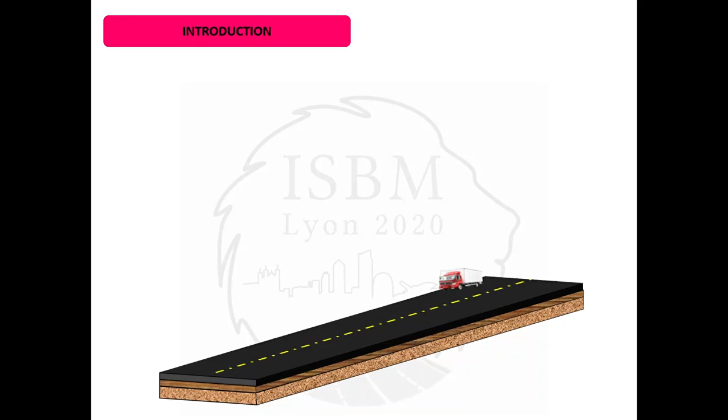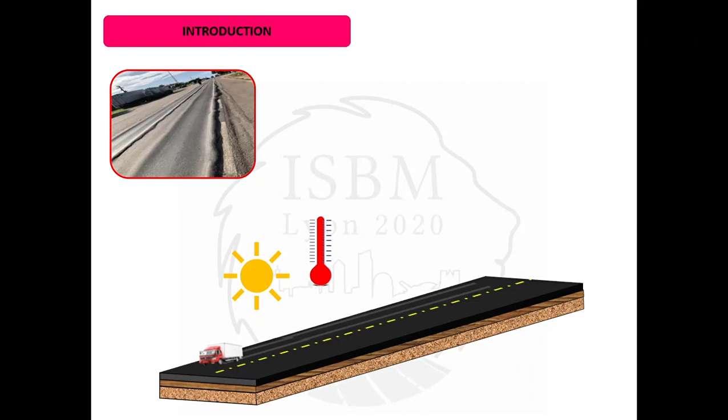It is important to point that one of the main distresses that occur on asphaltic surface layer is the permanent deformation, and it can be caused especially by the traffic load and the high temperatures. Here in the city of Fortaleza specifically, we have a tropical weather, which is favorable for the occurrence of permanent deformation on asphaltic pavements.

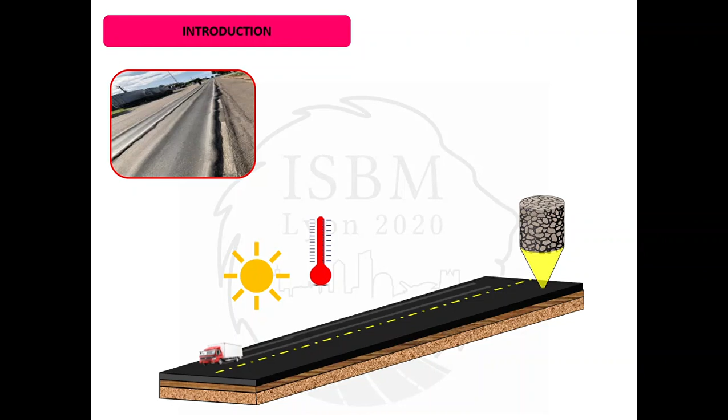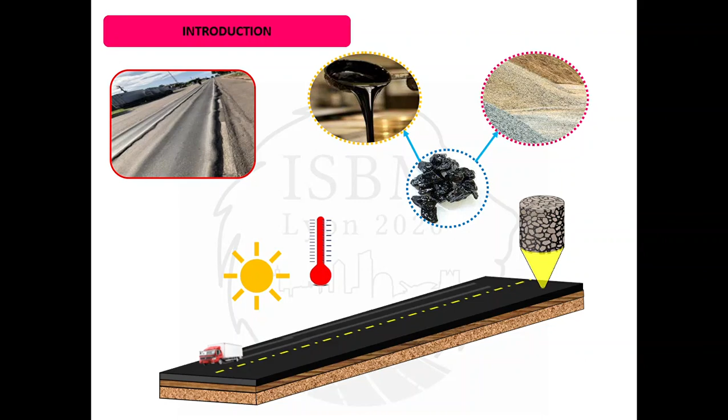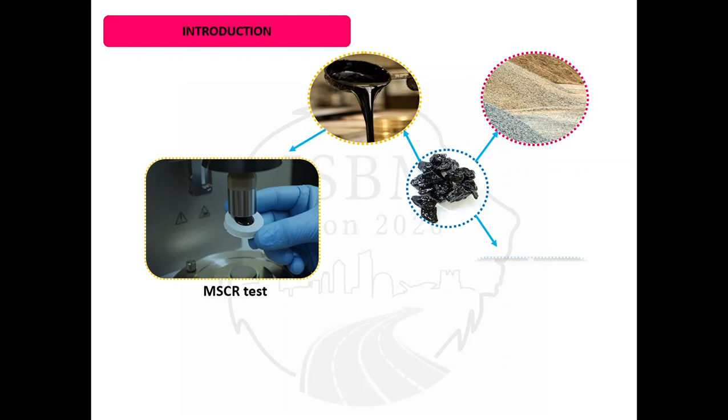To analyze the mechanical response of the materials towards this distress, we have to analyze not only the mixture, but also its contents, the binder and the aggregates. For this paper, we analyzed the binder's response with the MSCR test and the mixture's responses with the uniaxial repeated load test, which provides us the flow number value.

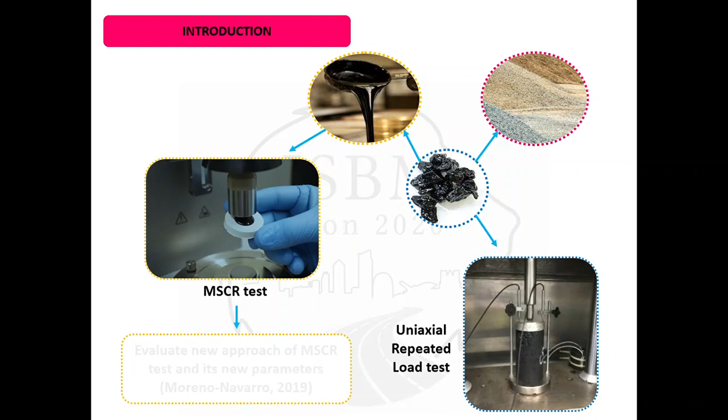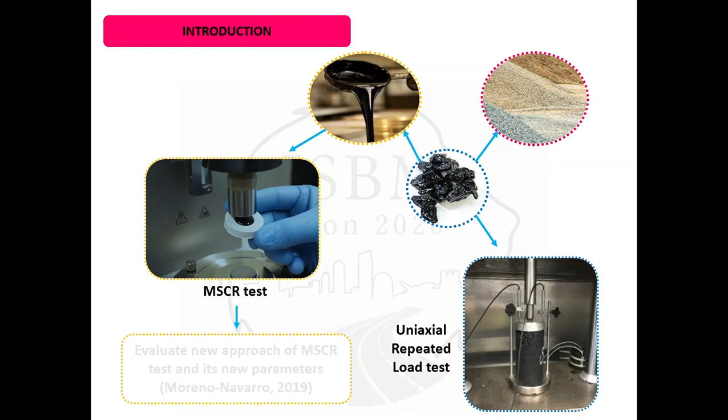But the main objective of this paper is to evaluate the new approach of MSCR test and its new parameters proposed by Moreno Navarro in 2019. And in Brazil, the national standard for this test protocol is still being implemented, so new inputs and reviews are welcomed at this stage.

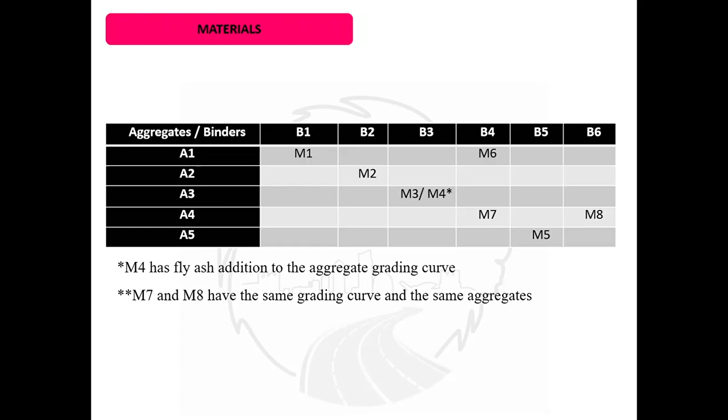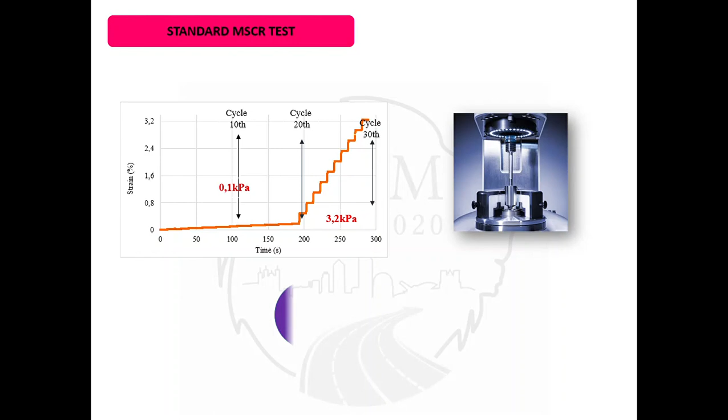The standard MSCR test was done following international standards, and we obtained with it the parameters of non-recoverable compliance and the percentage of recovery for each binder.

We have here binders analyzed on its performance grade temperatures, and according to those temperatures and the values of non-recoverable compliance, we only have indication to use binders B1 and B2 on a standard traffic load.

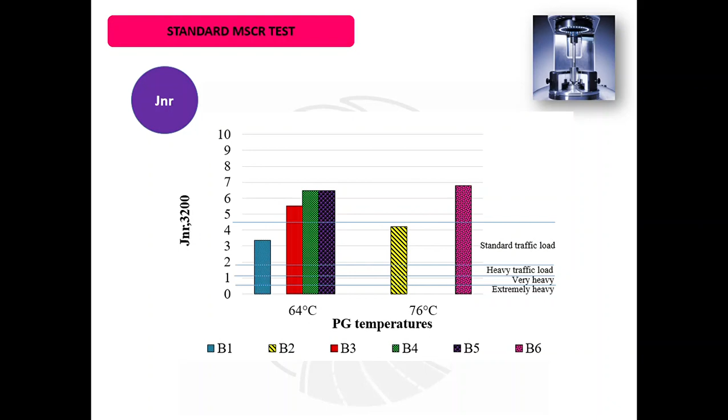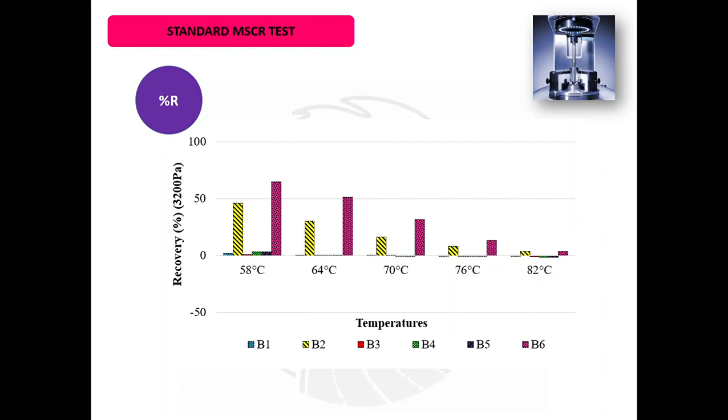With the percentage of recovery, we can identify that binders B2 and B6 have better response when it comes to permanent deformation on every tested temperature.

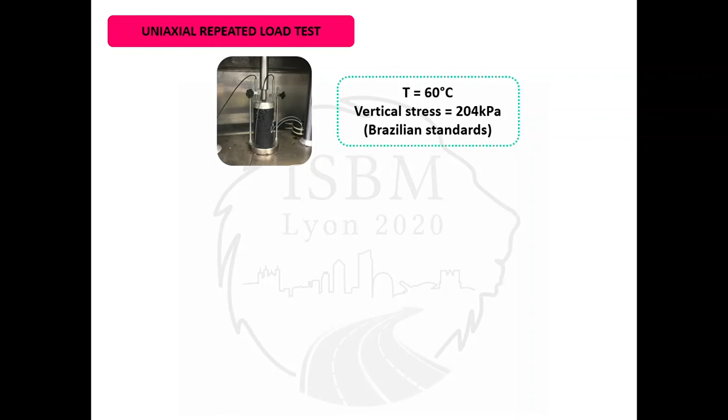The uniaxial repeated load test was performed according to Brazilian standards, using the temperature of 60 degrees Celsius and the vertical stress applied of 204 kPa. With that, we obtained the flow number values for all 8 mixtures.

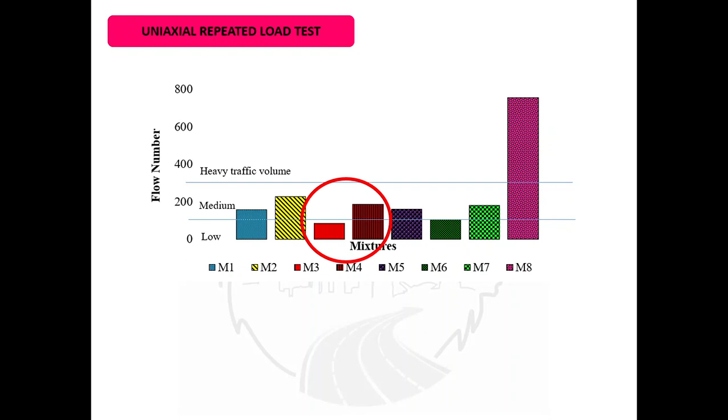We have here the classification according to the traffic volume for the 8 mixtures following Brazilian standards. If we analyze closely mixtures M3 and M4, we can observe that the addition of fly ash to mixture M4 resulted on a better mixture when it comes to distress of permanent deformation.

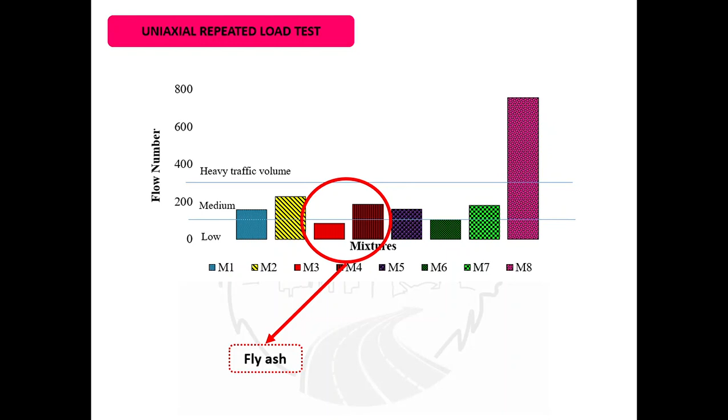If we analyze here mixtures M2 and M8, we can see that the lower non-recoverable compliance presented on binders was on the binder used on mixture M2, and the higher recovery percentage occurred on the binder used on mixture M8. So it is comparable to the binder results, the flow number results.

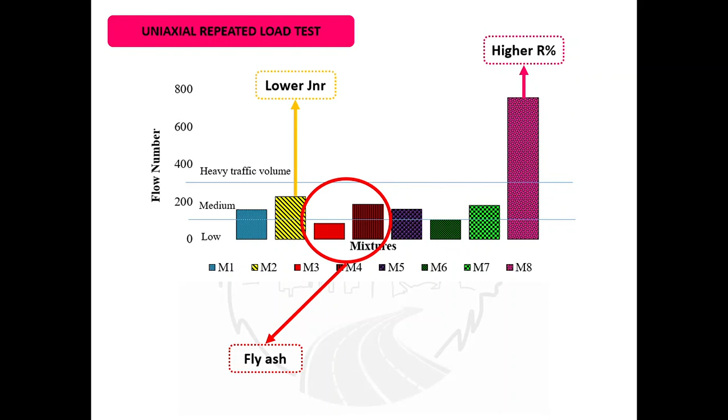If we analyze mixtures M1 and M6, we can observe that binder used on mixture M1 had lower non-recoverable compliance and higher recovery percentage, which is good for permanent deformation. And the result of flow number values also showed that tendency for the mixtures.

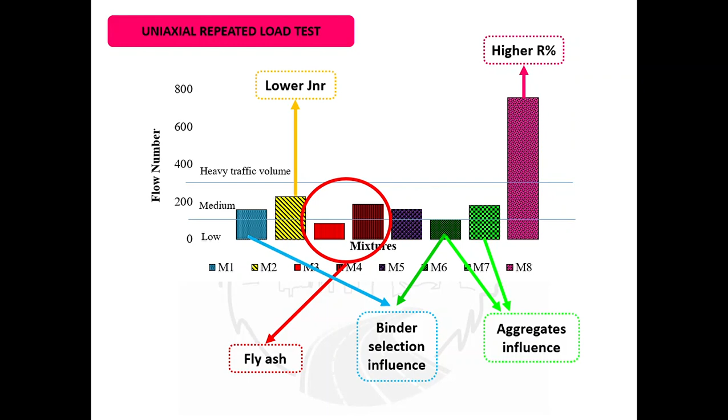On mixtures M6 and M7, different types of aggregates were used in the same binder. We can see that the aggregates also have influence on the final results of flow number values and on the response of the mixture for permanent deformation.

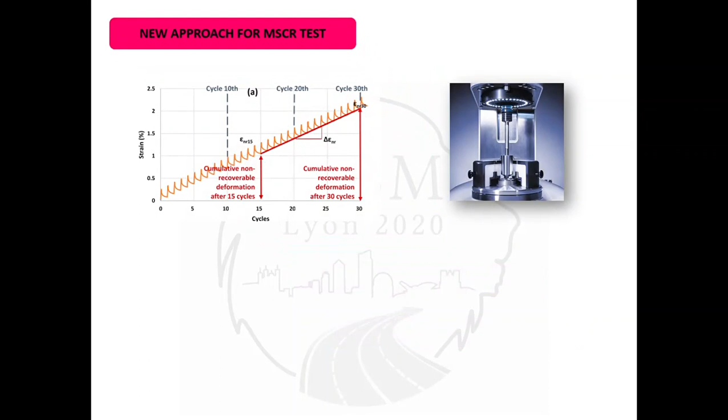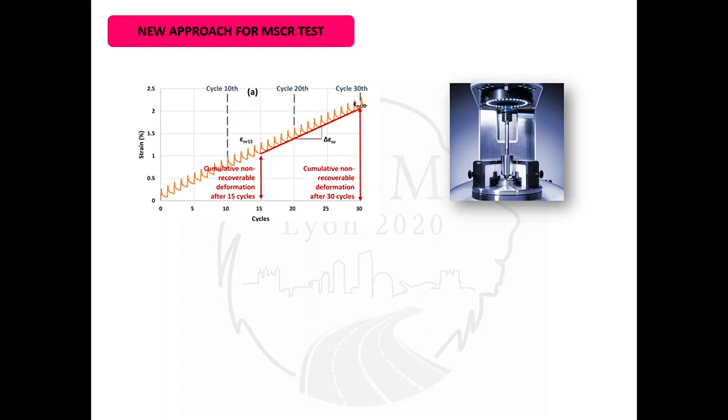For the new approach for the MSCR test, we can see that the testing protocol was different from the standard testing protocol. It uses the same stress for every cycle. Besides the standard parameters of non-recoverable compliance and percentage of recovery, Moreno Navarro also proposed new parameters to evaluate the performance of binders.

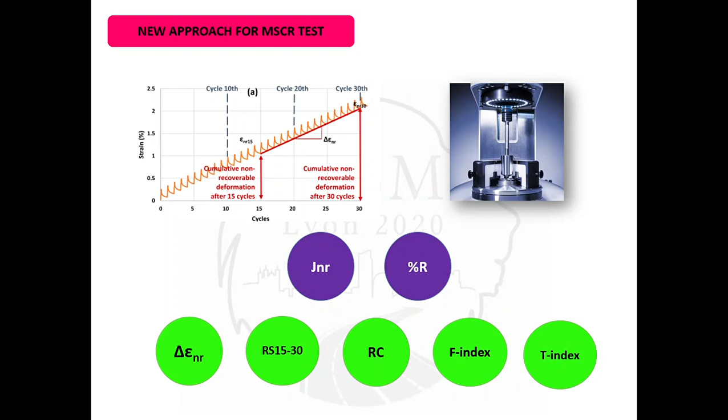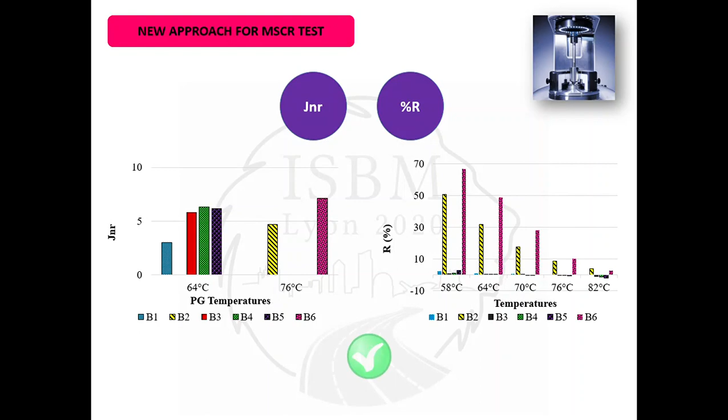We have here the results of non-recoverable compliance and the recovery percentage, and we can identify that they are similar to the standard method results, and binders are classified at the same traffic volume indications. So it's similar.

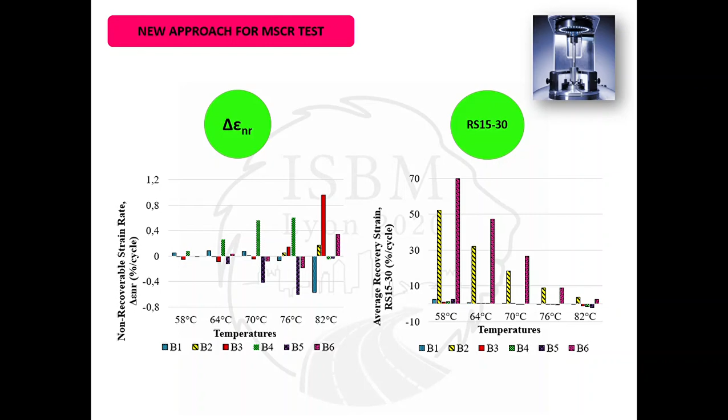Here we have the non-recoverable strain rate and the average recovery strain for different temperatures. It is important to point that the average recovery strain can relate well with the recovery percentage.

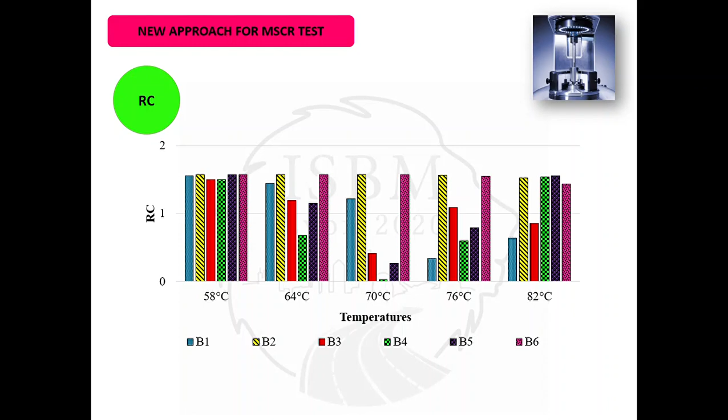Here we analyze the recovery capacity for every binder on different temperatures. And those parameters we've seen till now lead us to the flow index and the temperature index. And those are very important parameters.

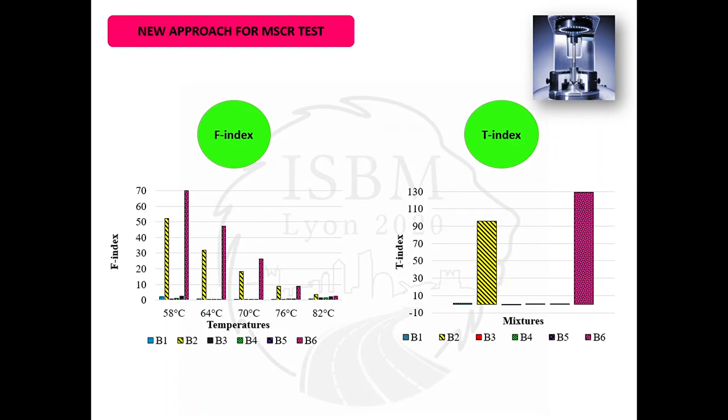We can identify here that for binders B2 and B6, the flow index are higher, and it indicates that they have higher capacity of absorbing energy without deforming. The temperature index only leads us to the fact that these two binders are more susceptible to temperature changes. It doesn't mean they are bad, it just means that they change behavior from 58 degrees Celsius to 82 degrees Celsius more than the other binders.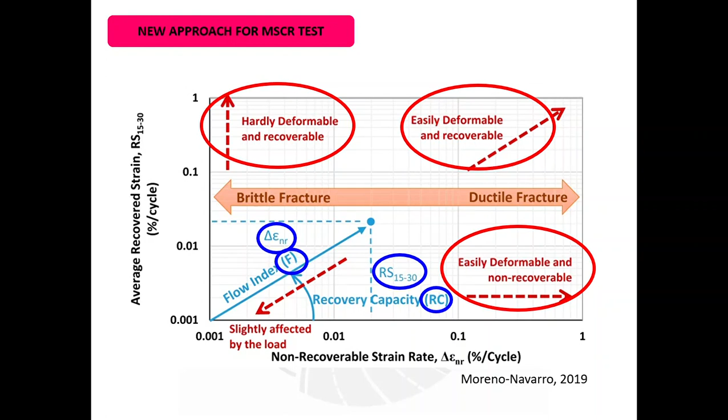As conclusions, first we saw that the non-recoverable compliance and the recovery percentage were similar to the MSCR standard test, so they can represent the material's properties just as well.

Analyzing the non-recoverable compliance for binders B4 and B6, they were similar to the difference of behavior observed on mixtures M7 and M8.

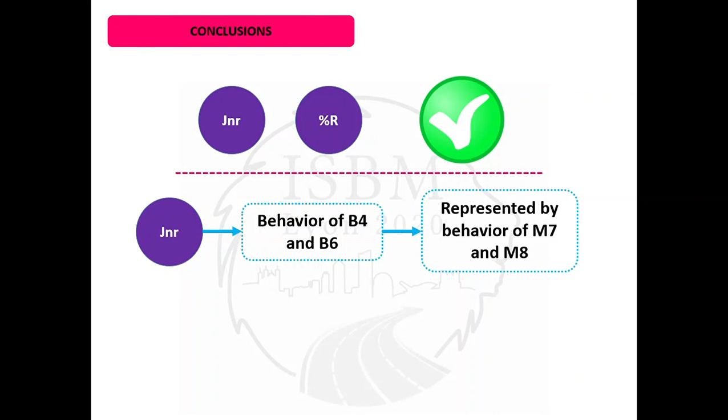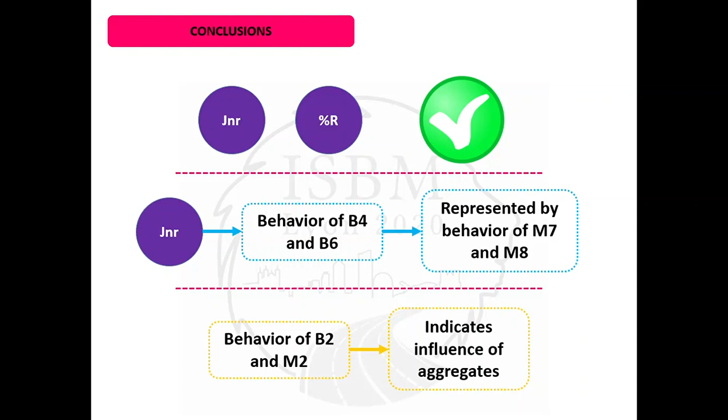If we analyze the behavior of binder B2 and mixture M2, we can also see that the aggregate's choice can have a great influence on permanent deformation.

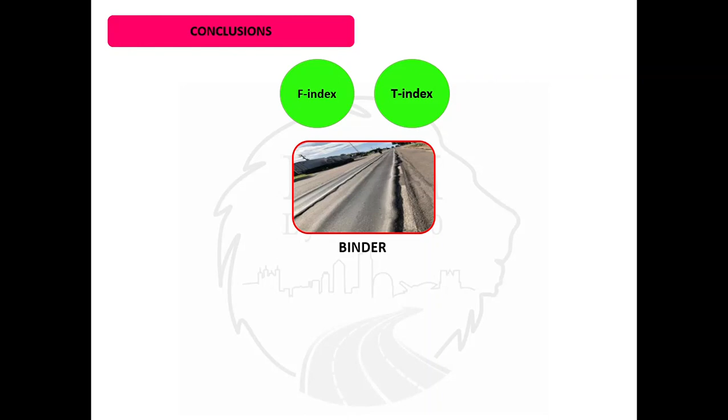With the flow index and the temperature index, only for the aspects of permanent deformation on the binder, we can analyze whether the binder is more or less susceptible to temperature variation. We can analyze if it absorbs more energy without deforming, and which binder has a higher recoverable deformation.

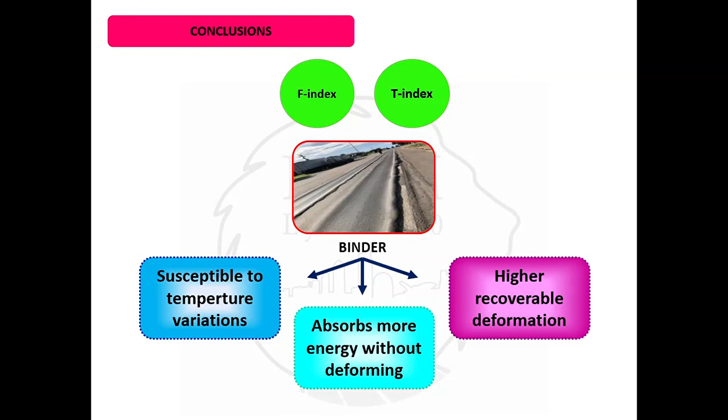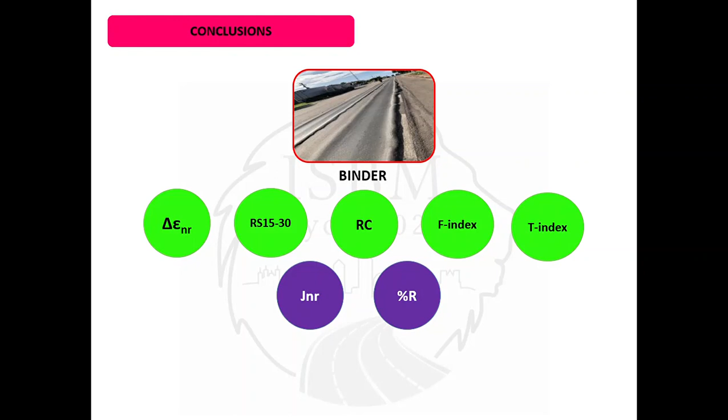Here we have all the parameters used for the binder's analysis, and the new parameters can explain more of materials' properties. However, the existing parameters are still efficient on binder selection.

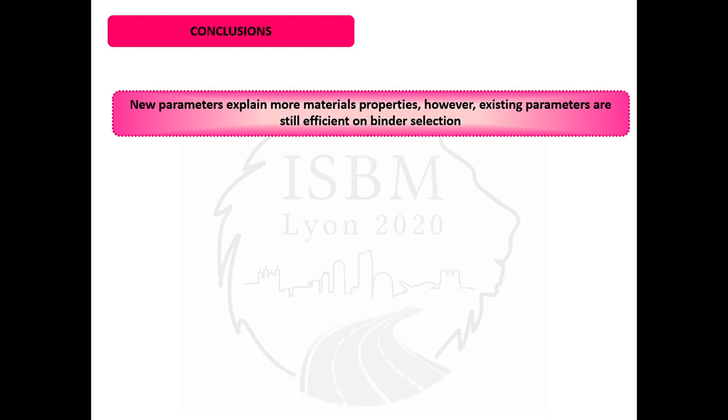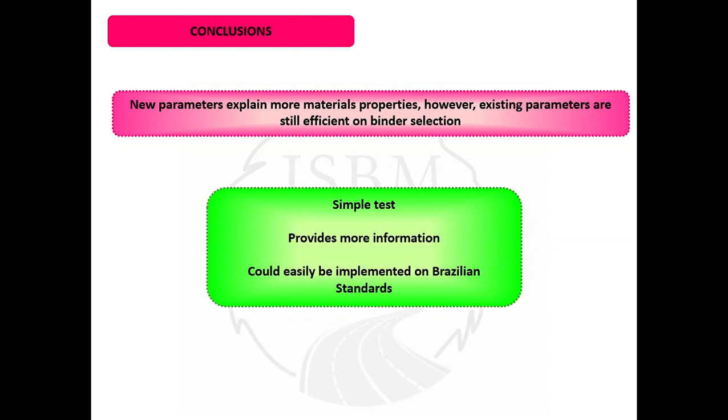Since the new approach has more explanation about materials' properties when it comes to distress of permanent deformation, it is indicated to be used on binder selection, especially because it has a simpler testing protocol. The path to obtain the parameters is also simple, and it can be helpful on preventing occurrence of permanent deformation. It could easily be implemented on Brazilian standards at this time.